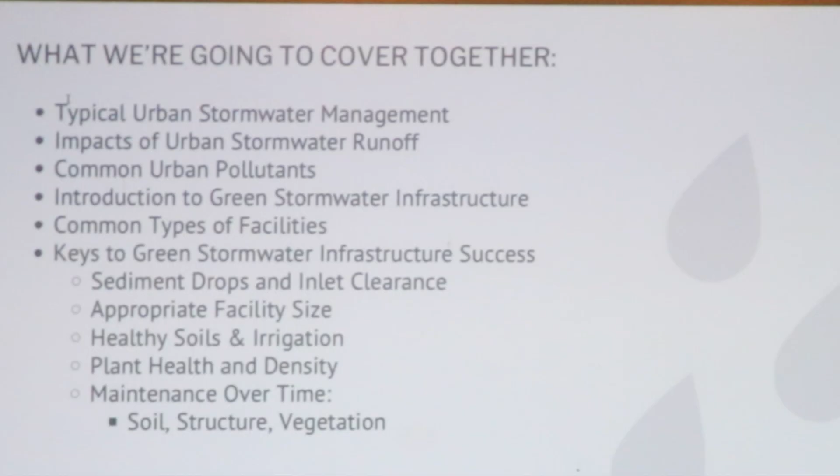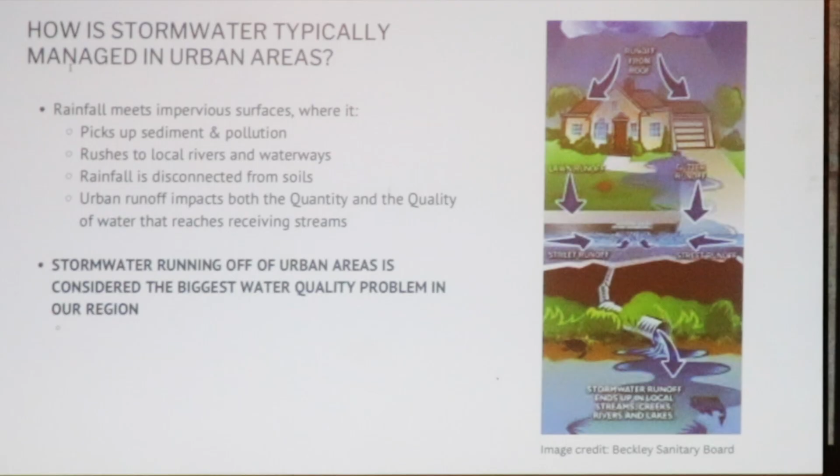So typical stormwater management these days in urban spaces is commonly what's called gray infrastructure. The water lands on our roofs, goes into pipes, gets piped out to curb and gutter and into the stormwater receiving stream. It never touches soil, never touches plants, and that is really how we clean the water - there are little organisms in the soil that we need to be partnering with for this cleaning process.

The other piece of the puzzle is that pollutants aerosolize - they pick up off the ground and fall back down. If they fall back on impervious surfaces, they sit there until rain washes them back into the system. If it falls on the lawn, it will pick up all of those things. Lawn actually has a high runoff rate compared to healthy soils and healthy plant communities. So that's our goal: healthy soils, healthy plants.

Here in Eugene, 70% of our stormwater goes into Amazon Creek. The other 30% goes into the Willamette River. Amazon Creek enters the Long Tom River just upstream of the city of Monroe's drinking water intake. It's something to keep in mind as you go around your day, looking at the impervious surfaces all around us. People know what impervious surfaces are, right? Okay, very good, I think we can go on.

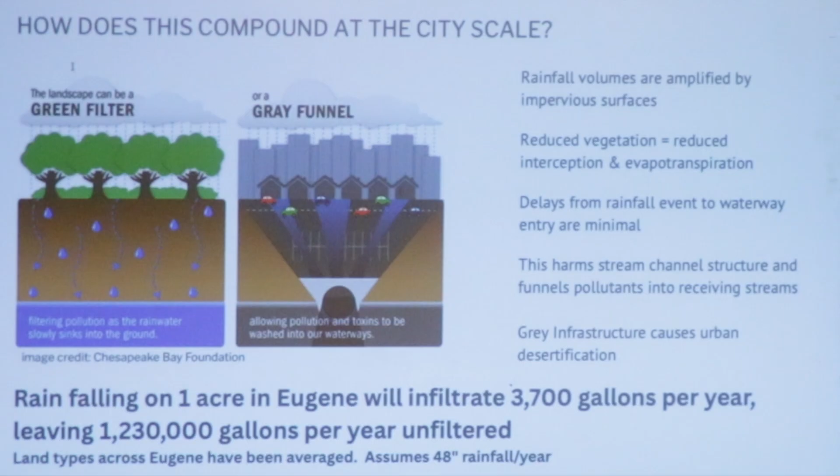If you take all of the land use here in Eugene and concentrate that down onto a single acre, only 3,700 gallons per year will actually infiltrate. The remaining 1,230,000 gallons per year go directly into our rivers. That's assuming a 48-inch rainfall year - that wiggles, but that's our average number. With climate change, we're getting more of these loopy jet streams. What I'm hearing is that number doesn't actually move very much, just when and how we get the rain changes. So I think we can still use that number for now and not second guess ourselves into oblivion, because there's just too much second guessing that has to happen these days.

We find new urban pollutants all the time. I would say the most recent one to come up into our body of knowledge is 6-PPD quinone, which is an ozonate that comes off of our tires and really any rubber that's outside. Once that rubber is outside, it's 6-PPD to start with, and then as it gets exposed to the sun, it sloughs off and becomes 6-PPD quinone.

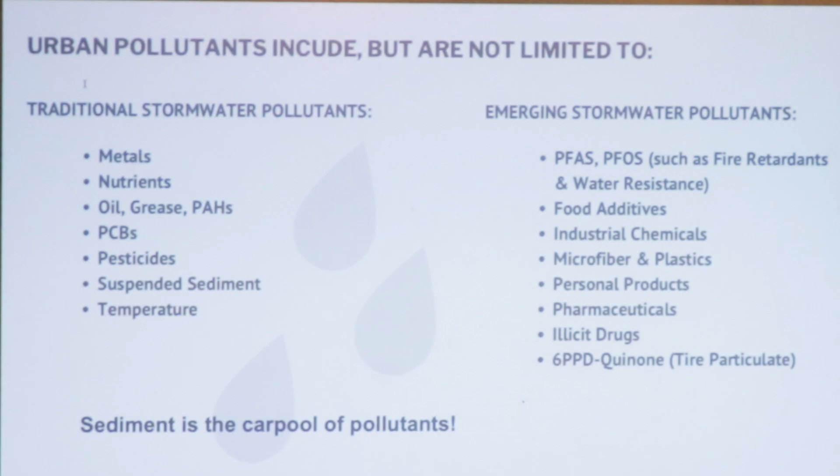This material we first became aware of up in the Puget Sound when they kept seeing the salmon die off after a rain event. What is happening here? So they really picked apart the urban pollutant matrix, and this new material, they had to give it a name. It's not a pretty name, it doesn't roll off the tongue, but that's the name they gave it. And they're finding some other 6-PPD variants.

So it is killing coho within hours of exposure. We're finding it in all of our bodies. It aerosolizes and we breathe it in.

Are they looking for an alternative? Yes, they're going about it slowly so that we don't replace it with something that is inadvertently more poisonous. So it's going to be a long process. But I do believe that there are tires available now without 6-PPD. So just something to be aware of. It's very hard to avoid.

The best thing you can do if you're driving your car is to have the right amount of air in your tires - the right inflation. A word that I don't enjoy, but it's appropriate here.

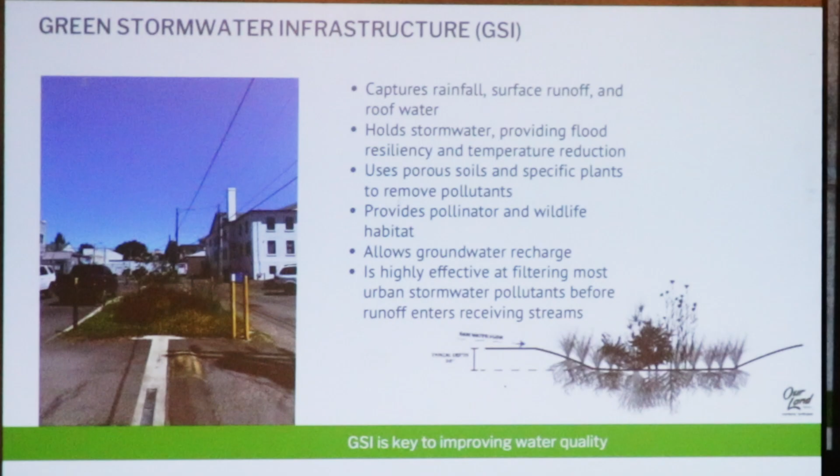So we're capturing that rainfall, we're holding it. So not only are we treating it, we're delaying that water getting to our stormwater receiving streams. And that's really important in that the flashy impacts in those streams erode the soil, bringing all those pollutants very quickly to all of those organisms. There's a lot going on there. So the more we can truly hang on to that water, the better.

So that's also going to give us some groundwater recharge. And one of the things that I'm continuously amazed at - it doesn't seem to matter what new pollutants we find, we're learning that if we allow it to have contact time with soil and plants, it's cleaned up. I don't think we know how long that's going to stay. Is it actually being changed into something else? Is it being sequestered? At some point, is that sequestration going to - we're at full and it's going to start sloughing off again? I think the answer is going to be different based on the pollutants we're talking about, the plants and the soil makeup, all of those components. So we're just doing the best we can here. This is the best tool we have right now.

So just going through a couple different plant types. I've coupled a diagram with a project that I've done. So if you have a question about the project that I'm showing here, feel free to ask. In most cases, you can just go see them.

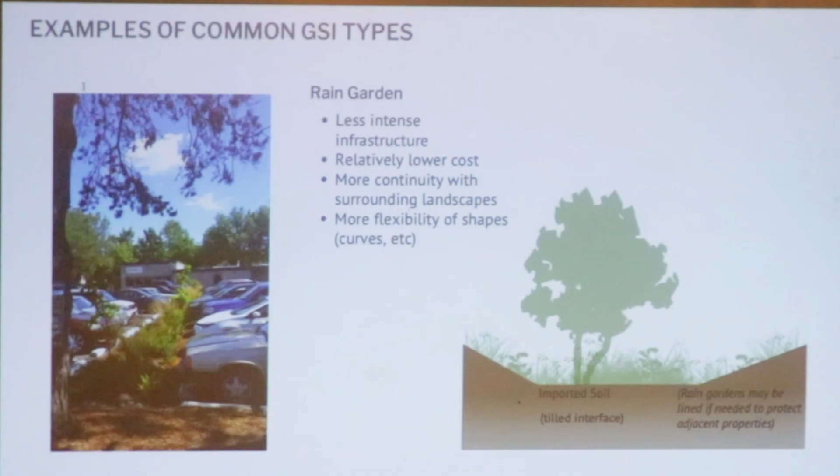Pretty simple. I'll get into the troublesome details later.

Yeah, I think we can do that. So this is an in-ground stormwater planter. They do not have to take up the entire front yard. This one did, because they wanted to manage not just the water coming off of their site, but also all the water that was coming onto their site from other nearby places. That's technically illegal, but they just wanted to go ahead and treat it.

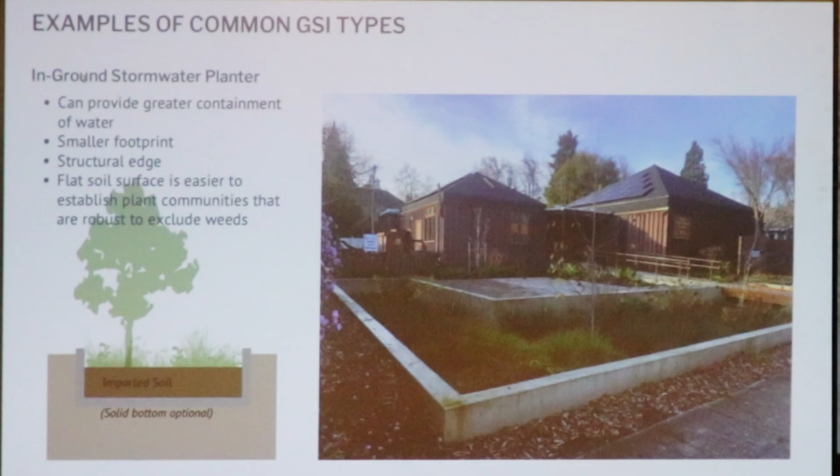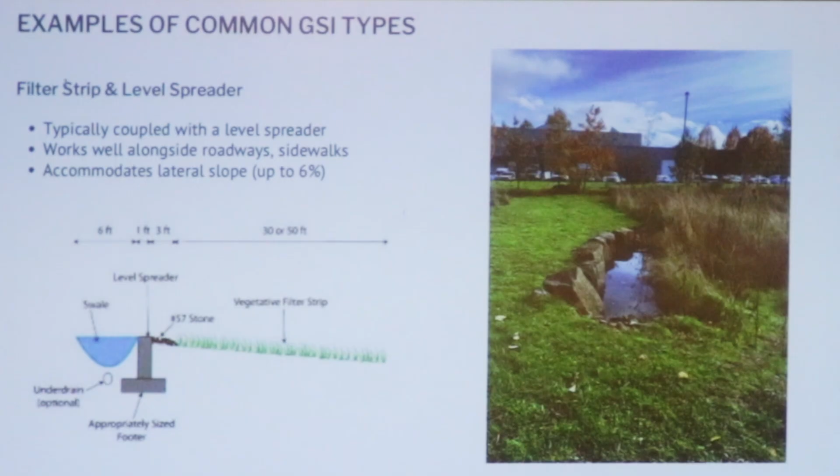I usually see really ugly ones like that diagram there. This one that we designed here doubles as a bench in the summer, so there's not water in the bottom. This was the non-smoking area at Mount Mosers.

And this flows down into a retention pond that flows into Amazon Creek, right there. A retention pond is one that has an outflow that is just a little bit lower than the inflow, so pretty high, and it's going to hold that water until it evaporates, evapotranspirates, infiltrates, what have you.

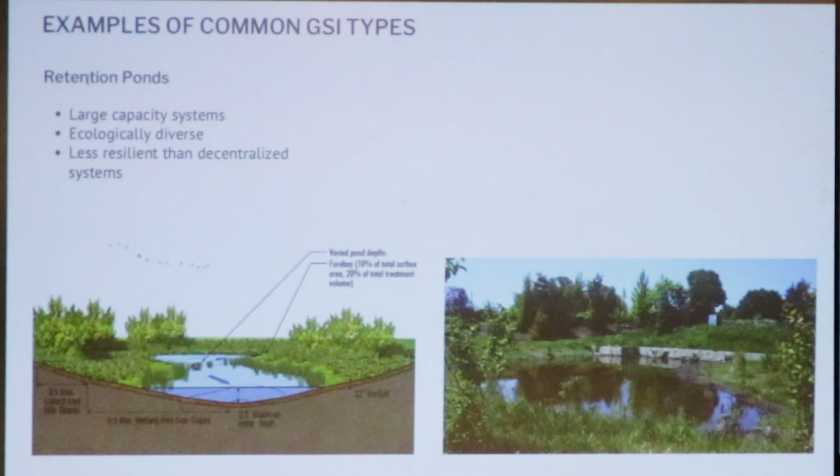So this is a fun one I got to do out at Thermo Fisher Scientific. They were tearing down a 3-story building. I said, leave the foundation, I want to use it. So that's it. The water actually flows in through the holes on the side and then flows over land before it hits the detention pond. Retention pond, sorry. Next we'll see a detention pond.

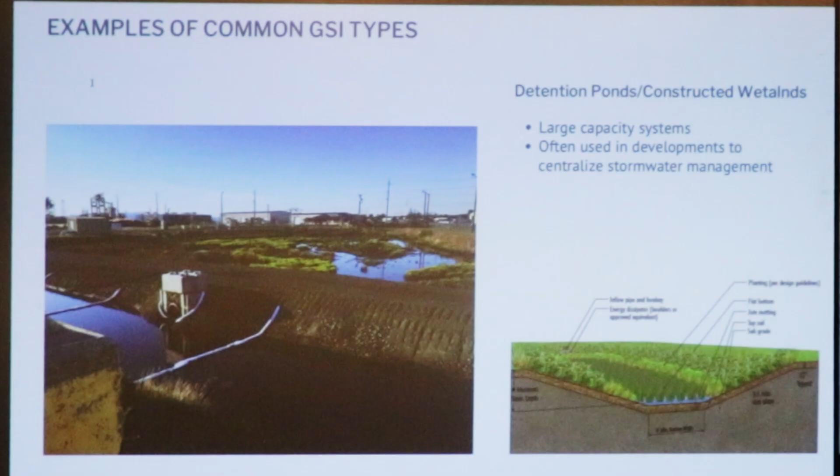This is that long linear swale, ends up here in this constructed wetland, and we have a forebay first, so we're finding all the ways to take that sediment out. As I said, the sediment is where the pollutants are. Is there water still with pollutants still in it? You betcha, but we get a head start if we can take out the solid particulates, anything we can. So yeah, this is a 5-acre constructed wetland, detention pond. It kind of runs the line there.

I was here late, I might have missed this, but you're capturing sediment. Is it being scooped out at some point, and where is it going? Did I miss it, I'm sorry? You did not miss that, no. So the answer is it's garbage for now.

If you have a small facility and you're scooping with a shovel, that goes in the garbage. If you are using a backhoe or some large equipment, then that goes to the part of the... words, sorry.

It goes to the polluted side, the extra polluted side of Short Mountain, where they leave it to aerosolize the pollutants until it reaches a level that DEQ thinks is okay to then put into the garbage. I put in the Lane County Waste here. I was hoping to write a grant to make this happen, but I'm not with the Long Tom anymore. Who knows if it'll happen again.

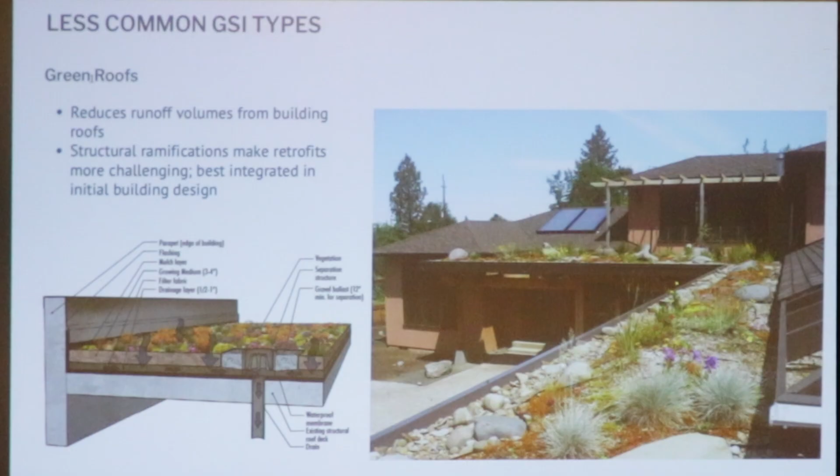Habitats, way back in the day, did this. This was the stormwater demonstration home. Got a grant for it, and then we also did the sequential biofuel roof. Is that Jeff Art back there? Jeff was instrumental in both of those green roofs.

He bucked all the green roof systems, just turned it all upside down. The typical green roof has highly engineered soils that drain the water off very, very quickly. They plant them with sedums, which don't evapotranspire, nor do they take up water very quickly. So it just really changed things around - high organics in the soil, and all your wetland plants out there, mixed with some upland plants, because they're each going to have their time to shine throughout the year.

I'm really curious about green roofs, and I don't want to take too much time in your presentation. Got a card up here, and I know how to contact Jeff, so you can contact him directly. But if you have a specific question, people want to hear them. I feel like it would get too granular. You got it, okay. Later, later.

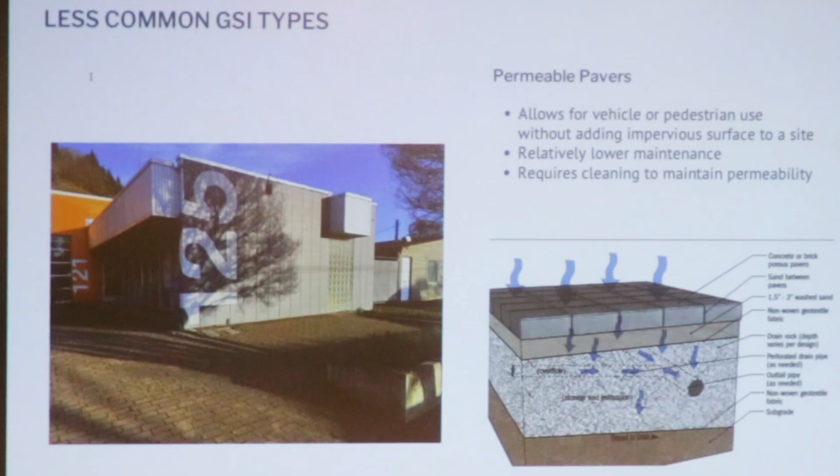And then, of course, there's permeable pavers - let's just allow the water to seep in. We know that impervious surfaces have function. I want to have a solid roof over my head. I don't want to be driving through mud. They absolutely have a purpose, but they don't have to be impervious.

So not only do we have permeable pavers, up in Gresham they've been doing some fantastic work on permeable concrete and asphalt in high traffic areas and getting really good results. What else is exciting? You see this depth of all this gravel and pipes and infrastructure underneath. They did one stretch of road like this and one stretch where they just did a skim layer on top of permeable concrete and asphalt. The water was just as clean. So you don't get the infiltration, but you get clean water, and I think that's a win.

Cisterns - they actually took cisterns out of the Eugene Stormwater Manual. I think they're a really effective tool, especially when you're in a high clay area or just don't have enough area to really get as big a facility as you want. So this can be your storage area.

In this case, this is still the Stormwater Demonstration House. We had a little quarter-inch tube that we just left open through the winter, so it would trickle out. You'd get a big rain, it would fill up, and the water would trickle out, and then there's room - the next time it rains, it fills back up again. So it's a delay mechanism, and of course, then you have water stored on your site, which is a good thing.

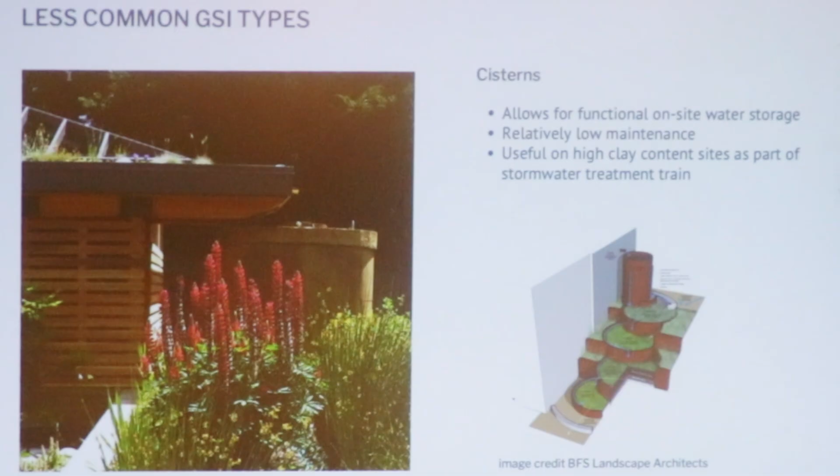People don't think about them, but we've got catch basins all over the place. They are capturing water - many of them are designed to take out the oils and trash. This is only effective if you regularly have them cleaned. This is not something you want to clean yourself, really, unless you're a very small residential site.

So I worked with Lane County, and there's now a program - what do we call it - the Storm Drain Cleaning Assistance Program, which cuts the price of cleaning these things in half. They're able to do that by having 2 sign-up periods through the year, and then they bank those people who've signed up and map them out, and they go do all the ones that are next to each other at a time. So you're doing a lot of good by signing up for this program. Please tell everybody about it. Anybody who has a storm drain can sign up for this unless you're industrial or public, and it literally cuts the price in half.

Is that all of Lane County or just Springfield? All of Lane County. They were doing it out of the coast. Yeah.

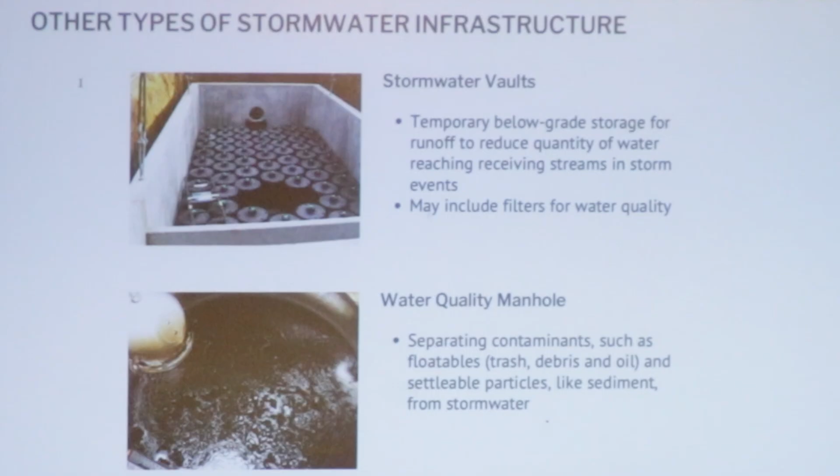So I can't really stand by these, but they exist. There's filtration media or just collecting the water in, I call them swirlies, because when the water comes in, it swirls and the trash falls down, and sometimes they come and clean them out.

I worked with Springfield to put one in just above Day Island Park, or Island Slough, which is entirely stormwater fed. I checked in five years later to see how much was coming out of there, and they're like, oh, we should clean that. So remind everybody to clean these things. They don't, it's out of sight, out of mind. That's one of the good things about great stormwater infrastructure is you can see it and you know when it needs help. These things are under a vault. Who knows what's going on in there? And you have to replace them, and then they're garbage. You can't reuse those.

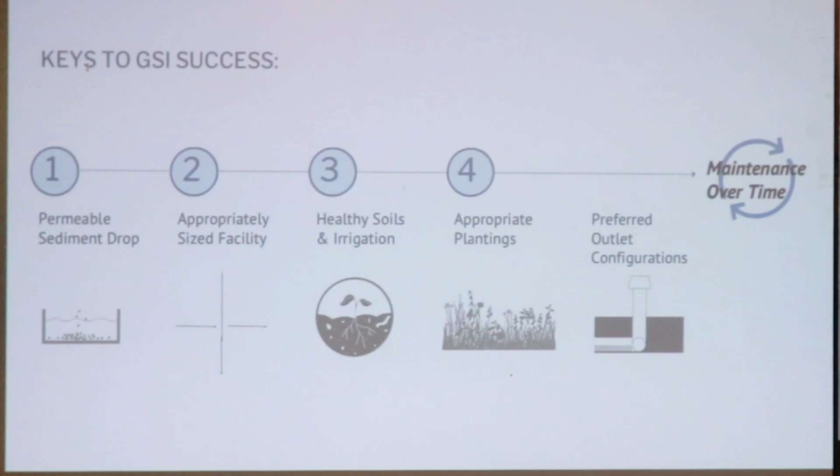So, keys to GSI success. I think you've seen all around the city, we've got all sorts of rain gardens everywhere. They might start out planted, but usually pretty quickly they turn into either weeds or grass, or they're no longer a complex planting. Yeah, they tried.

Some of the, we'll go through the pieces of the puzzle. Yeah, so we'll start with the, okay, yeah, okay. Thank you, man.

So these are two different sediment drops. The one on the left is the permeable sediment drop that I was mentioning, and I do have a cross-section in the next slide here. This is at Willamette Christian Center in the parking lot, so you can go by and see those.

I think I'll wait to describe exactly what's going on until we're looking at the cross section. There's different ways, of course, that you can design this. You don't have to have a metal structure around it.

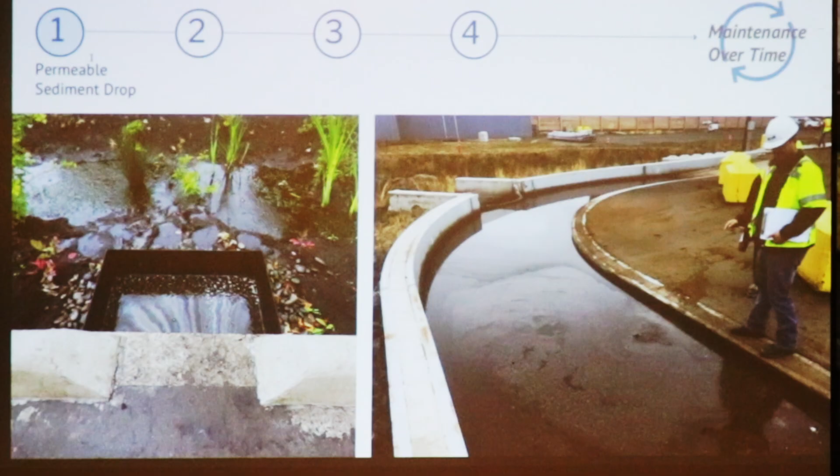I got really excited for a while. I was using, you guys probably know the name for this better than I do, their front loader through here. That's how we sized it. It's the width of their front loader, so they can just drive through and pick up sediment before it goes into the swale.

So here's the cross section. Again, it doesn't have to be metal, but see, I've got holes running all around the sides. I'm like plugged up. Okay.

So, water enters here. There's a metal structure coming around that is perforated. There's gravel through here, then there's gravel on the exterior as well. So there's ease of transfer from in to out.

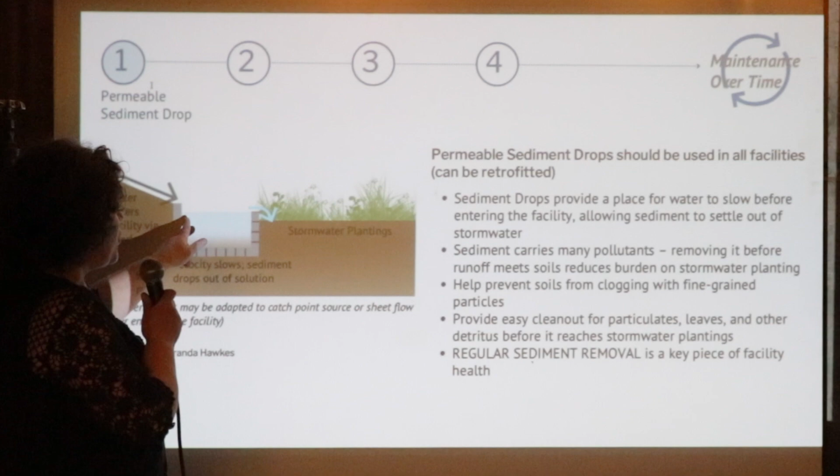And then I put a single piece of fabric, small gravel, and a concrete paver that doesn't fill the entire space. It just leaves an inch or two around it, and then continue that small gravel up and around it. So you can take the sediment, it just sits right on top of that paver. Should anything get clogged, you only have to go as far as that piece of fabric to clean that whole thing out. They're collecting the trash in here, and I don't know how many stormwater facilities I've seen that were just full of trash.

Does trash still get in them? Yeah, the wind is not our friend in this case. But the majority of the trash is easily accessible and cleanable.

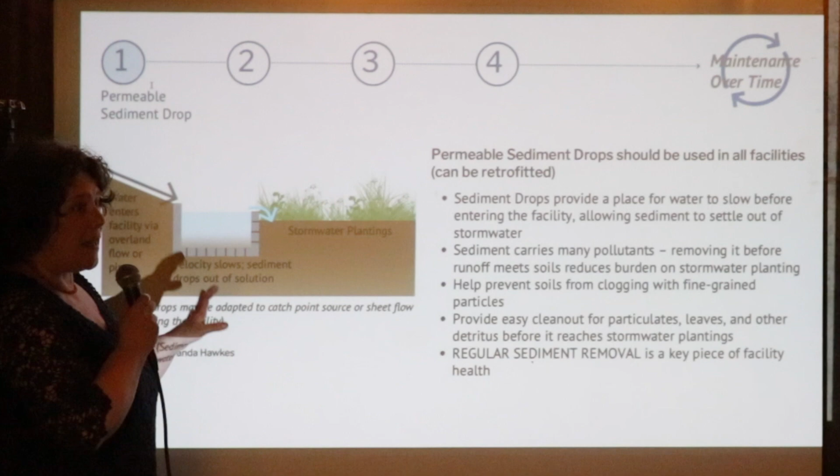So, if one of you has a great idea of what else I could call these besides permeable sediment drops, because that does not roll off the tongue, I would love to hear what that might be.

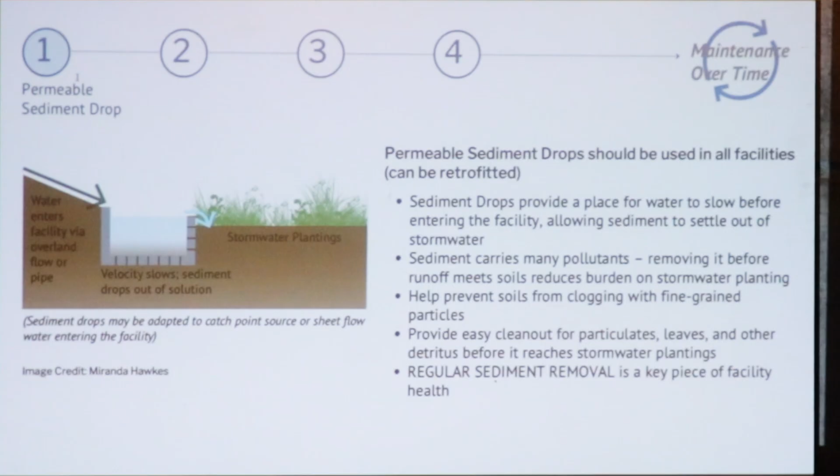Was that? We all like it. We all like it? Oh, okay, I'll just do it. It's so fancy.

Yeah, any questions about that? This is really the primary thing that can fix a stormwater facility. Just put in a permeable sediment drop right at the inlet. Because what happens if you don't do that is, so not only is sediment a carrier of pollutants, that sediment is teeny tiny. It's been aerosolized and then it's fallen down.

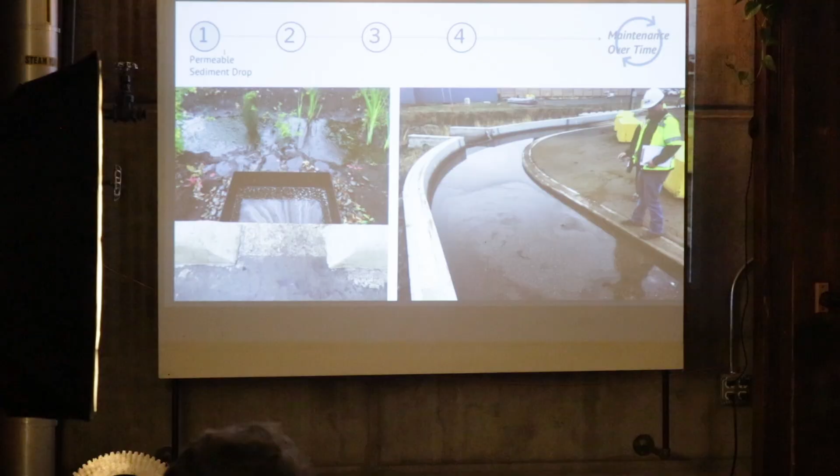I think you've seen that fine powder. If you go back one, this is all that fine sediment there. That clogs the open pores of the soil in our stormwater facilities. And so I've seen so many times that crust just sit right on top.

The plants now don't have access to water, nor do the organisms living in that soil. And the water, there's no capacity anymore, right? The water's coming in and going right back out again. That is not doing what we wanted it to do, and we spend a lot of money on these facilities. So we just put in this piece of the puzzle, a lot of other things just happen right, because weeds thrive in that really tough soil conditions. You know, like, give me a crack with no soil and those dang weeds will thrive, right? So that's what we're seeing in our stormwater facilities mostly.

How long have you, when did you first put one of these in, and how long has it lasted for you? Well, the first ones were done with the Faswall material, and those are still sitting there behind First Christian Church. There's a paved parking lot right off of the alley behind them, between Willamette and Olive. You can see the Faswall disintegrating there, and I did that just before COVID hit, and I believe that was my first one, so 2020.

Question: I'm stuck on having a permeable bottom but being able to scoop it out with a skip loader. Oh, the permeable bottom's gonna get destroyed. Yeah, that one was not permeable - it flows into a swale. It's a piece of what I call a treatment train.

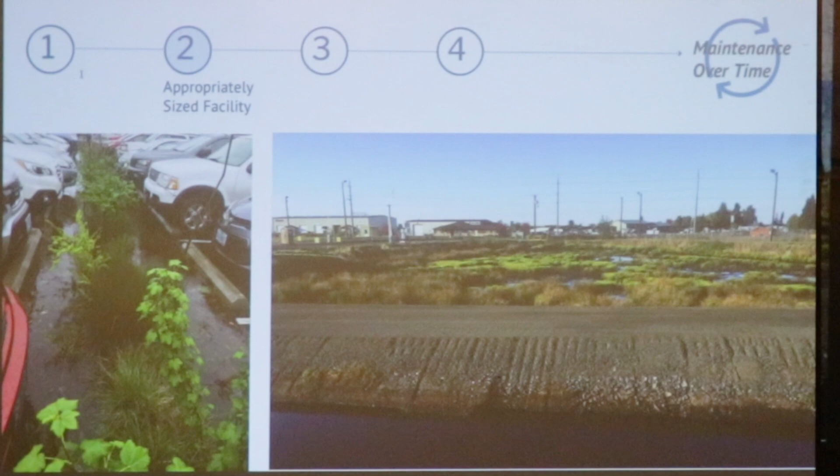Sizing. This is really, so when you look at how to size a facility, there's 3 different categories: filtration, detention, and complete management all on one site. I'm not using the right terms here, sorry.

You want to do all of this reduction of impervious surfaces before you get something permitted, because afterwards you're only allowed to reduce your fee by 10%. So get it right to start with if you can. Still do it, it's not all about the money, but you know.

Again, the sizing does not recognize this climate change we're coming across, and we know we get a lot of water at once, then not a lot of water, then a lot of water. So make your facilities as big as you possibly can. Therefore, I think they should also be as aesthetically pleasing as we possibly can. Nobody wants something big and ugly on their site.

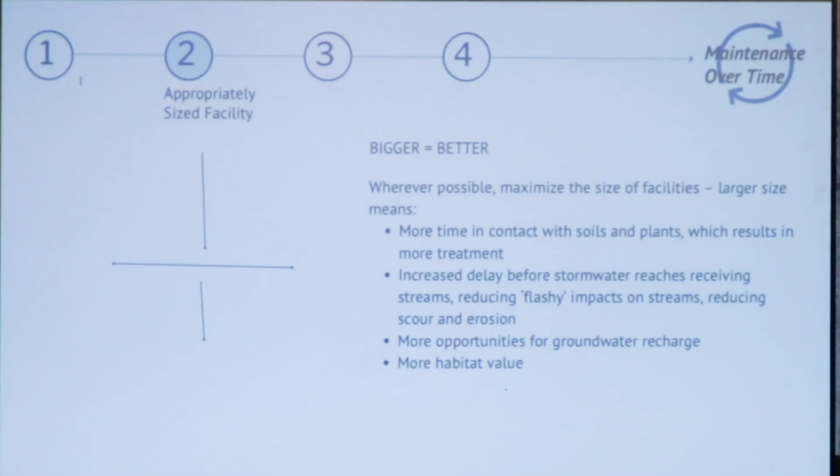Yeah, I don't think we covered all of those - more time in contact with soils and plants, some more treatment, increased delay before stormwater reaches the receiving streams, reducing the flashy flows, more opportunities for groundwater recharge, and more habitat value.

One piece I didn't touch on is that the city of Springfield relies on groundwater recharge, that's where their water comes from. So if water lands on the ground in Springfield, we're drinking it. Something to think about - I'll just leave it at that. So this gets really complex.

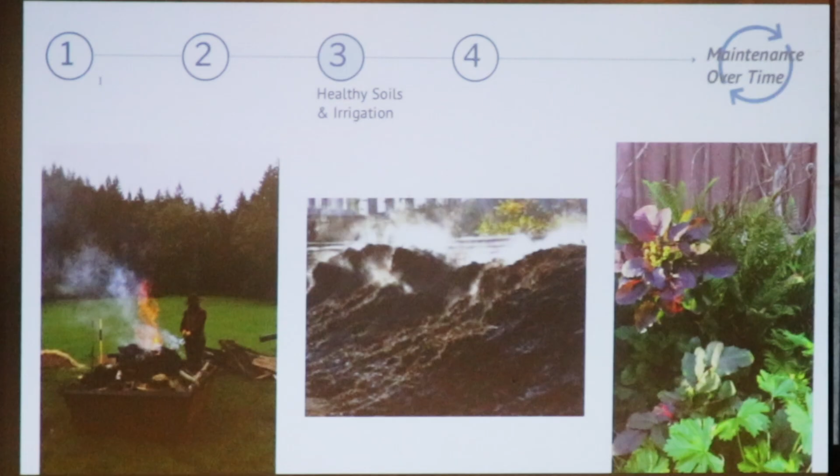Just as I learned from Jeff on this, just because somebody has stated what the soil should look like, you might want to think about that a little longer. Engineers originally came up with the specifications for stormwater facilities. They really don't like flood liability, so they wanted water to move through the facilities as fast as possible. That's not best for water quality and downstream effects.

So what we've been doing is using a lot higher compost content, and a newer thing that's come about is using biochar. Is people in the room familiar with biochar? Getting some thumbs up. Okay, so in many cases, especially in industrial sites, people like to just put bags of biochar down, and they do see a reduction until that biochar gets filled up, and then it's going to flush right back out again.

So we need complete systems. We have the healthy plants. As the roots grow, not only are they picking up more pollutants, they're also supporting more of the soil organisms. Those soil organisms are doing a lot of changing some, not all, of the pollutants into something that's bioavailable, especially the heavy metals. Those can then be uptaken by the plants. Also, those roots help with infiltration.

So many times I've seen my facilities get completely full year one. They drain faster year two. By year three, they're hardly holding any water unless you've got a really huge rain event. So the root development absolutely matters in stormwater facilities, which means we want really, really healthy soils. It's everything working together for these facilities to work.

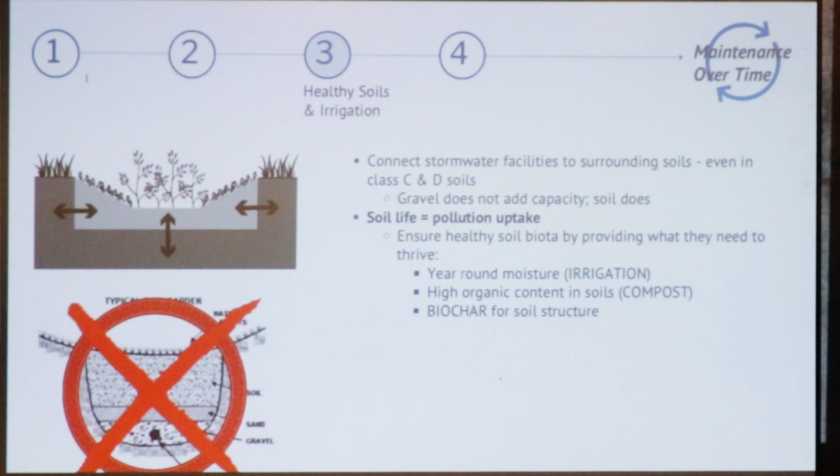So in most facilities, in most manuals, they call for a separation between—in the city of Eugene, they call for a minimum of 12 inches of soil. Most people go with the minimum. Can't even get a tree in that. A shrub isn't going to thrive. And after that 12 inches is fabric, and then gravel, and then a pipe. So the water's running really quickly through these facilities.

If you really want a facility to function, you have deep, healthy roots. Just don't have gravel and fabric. At Willamette Christian Center, what we did, and this is what the new Portland manual calls for, is you only have gravel and a pipe for the bottom, the last third of your facility. So you're still not going to flood. And there's always an overdrain to collect that top layer.

So as the water fills up, use a standpipe at the highest point that you want water to be in your facility. So there's somewhere for the water to go if the bottom is fully saturated. There's always ways we can make it so it's not going to flood.

I don't know how much more I need to say about plantings. Ideally it's native because, of course, we are directly connected to the stormwater receiving streams. If you have weeds and non-natives, those weed seeds can get carried on down. So I think it's important to go with your native plants in stormwater facilities. The science says if we want to be supporting the pollinators, we need to have a minimum of 80% natives in our landscapes. You put a lesser density of plants in your facility.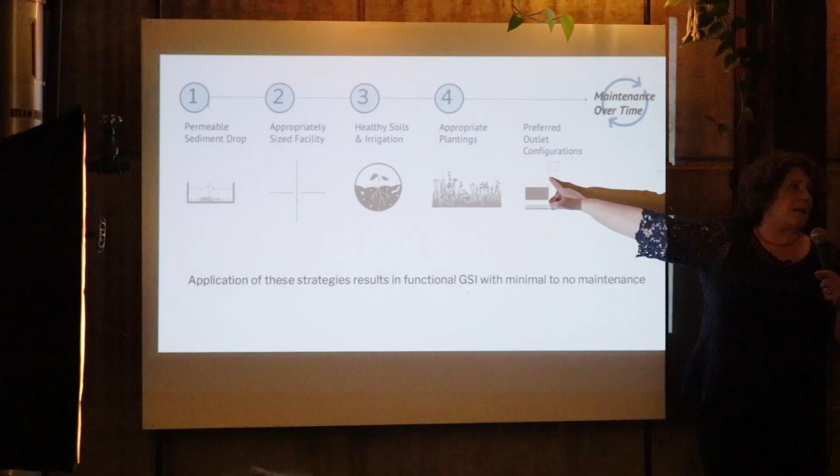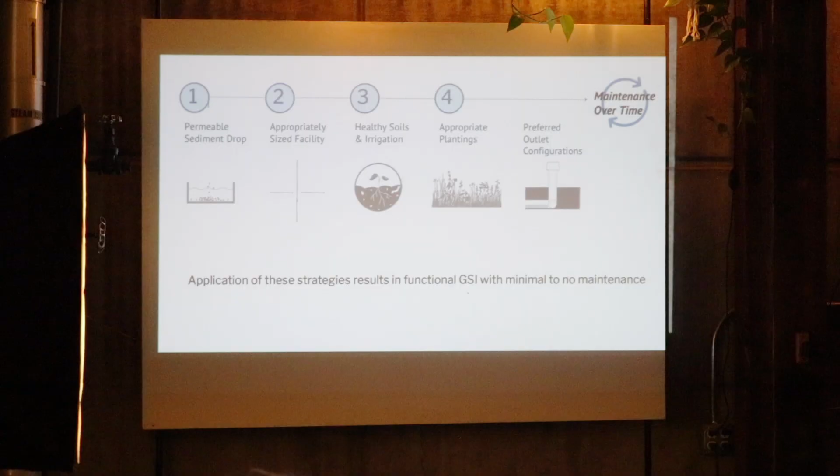You always need—this is the standpipe that I was talking about here. This is your overflow. This is your weak point if you're not maintaining. Leaves just attach to it once it's filled up all that way, and then where's the water going to go if it can't flow through and you're going to be flooding? So I try to tell people, even if you can't get out there and maintain these facilities, at least go check your overflow pipe and make sure it's clear. That's your base minimum here. Should more happen? Absolutely.

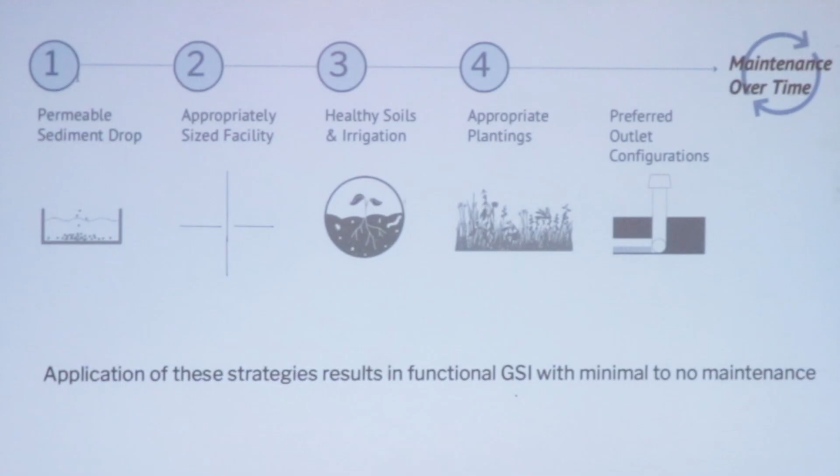Not always. Yeah. And I believe that's the end of my presentation.

Any other questions? Talk to us a little bit about the Amazon watershed and what we need to be doing differently, or how bad is it?

It's not pretty. You can go onto DEQ's Pesticide Stewardship Partnership site and look at the water quality data. It's only talking about pesticides, it doesn't get into what else is in there, and you saw a long list of other things showing up. We need to be holding the water on site as much as possible, whether it's reuse or cleaning or what have you. Keeping that water on your site is really going to be the best thing for all watersheds.

Thank you for the question.

I heard almost 30 years ago that there's Agent Orange in Amazon Creek, and it's for sale at every hardware store, most of the garden stores. My environmental philosophy is don't sell things that are poison, as opposed to trying to mitigate the ones that disperse. 2,4-D, that's Agent Orange. Why do you think there's zero effort anywhere, not just in Oregon, to ban that?